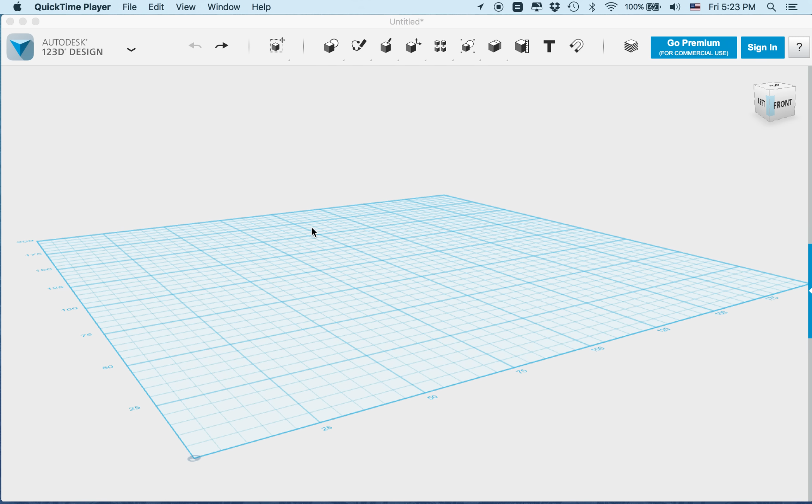Hi, in this tutorial I'll show you how to make the Williams Sonoma basket. I took the inspiration from this because I break it all the time. We keep it on the countertop and it's granite. And I couldn't help but think with my new 3D printer I'd figure out a way to simply make it. And it's got a very limited number of steps. So hopefully you'll enjoy this and just follow along.

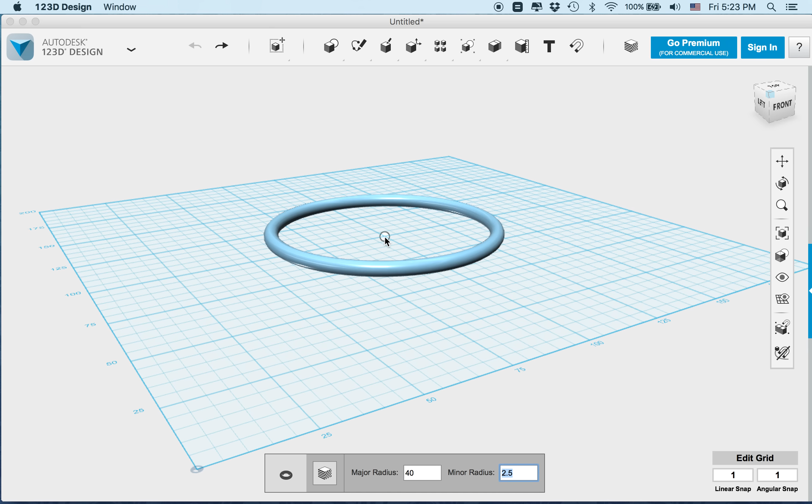So first thing I do is I looked at the base and it looks like it's a collection of toruses. So we set the major radius at 40, and the minor radius describes the distance around each of these cords, and it's 8 millimeters. So let's just set it for 8. I'm sorry, set the radius for 4, because the diameter is 8 as we measured it.

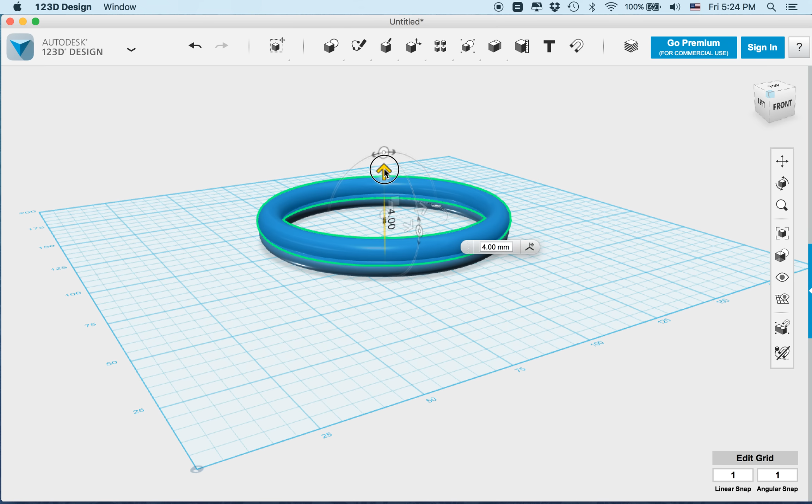And what we're going to do is take one and copy and paste it, and raise it up by just 7 millimeters, and there'll be a bit of an overlap between each of these. And then we'll do that again, cut, copy, paste, and raise that up to 15 millimeters. Okay, so now we have a nice stable base, and we're going to tilt this a little bit so we can kind of see the inside of it.

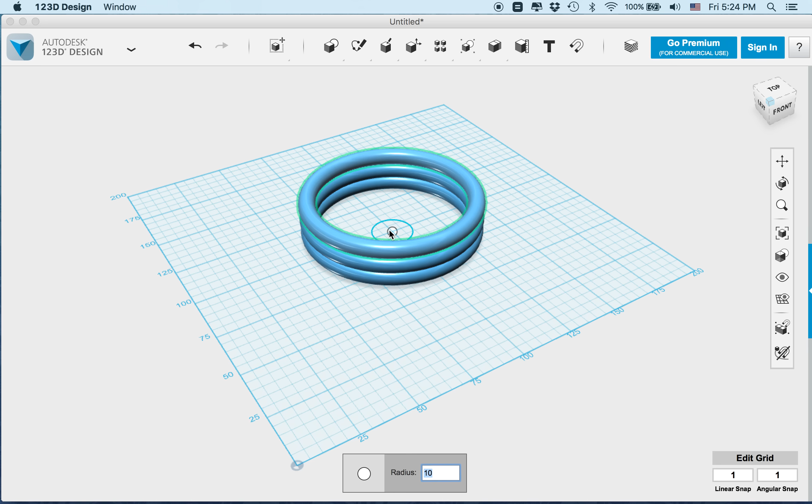I want to draw a circle in here that's also 40, and the reason will be pretty evident in just a second. So we'll draw a circle. This will allow us to do a couple of things, one of which is we'll use it to do this first extrusion. So we're going to extrude the circle out to seal up the base area, and we'll set that to 21 millimeters, and we'll go over here and merge it all.

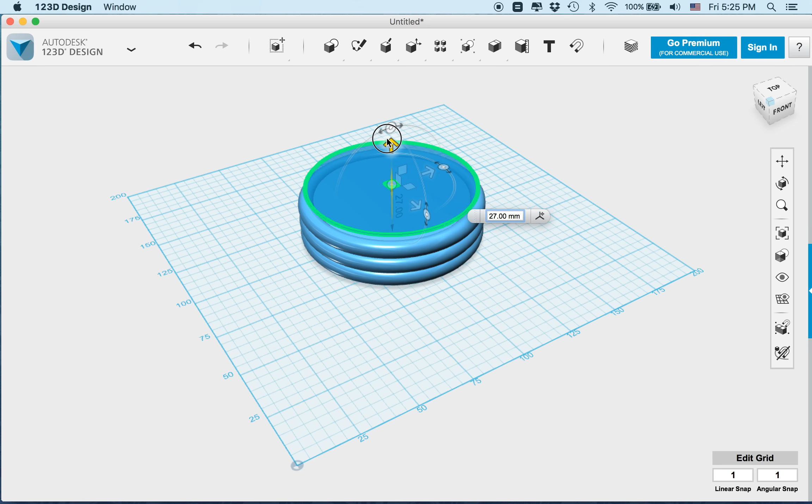So hopefully that's all merged up, and then we'll take that original circle and we're going to move it. We're going to raise it up to the top of this, don't need to raise it too far, but we're going to raise it there so that we can grab onto it and use it to draw the next portion of it. So then we're going to draw another torus, and this is where

things get interesting. So we're going to put this torus on the edge, and we're going to make it a little bit smaller. So we're going to make it not that big, about 30, to give this some diameter. Okay, and once again we're going to make the minor radius 4 to match the rest of it. So we're going to return that and put it on the edge there.

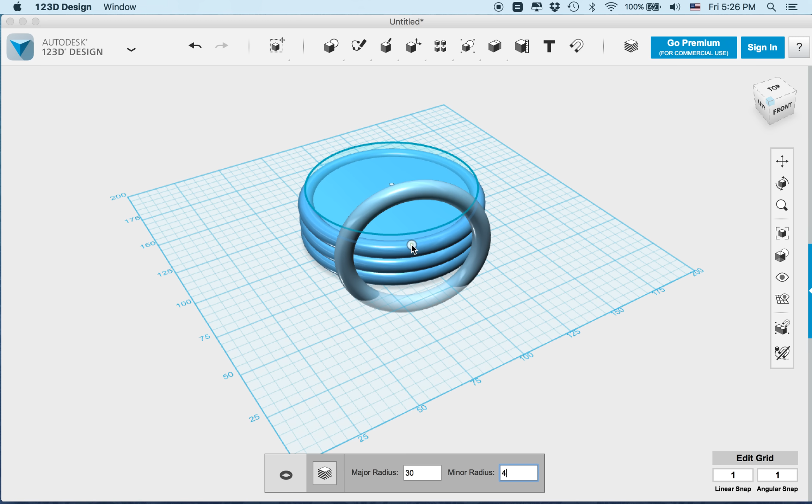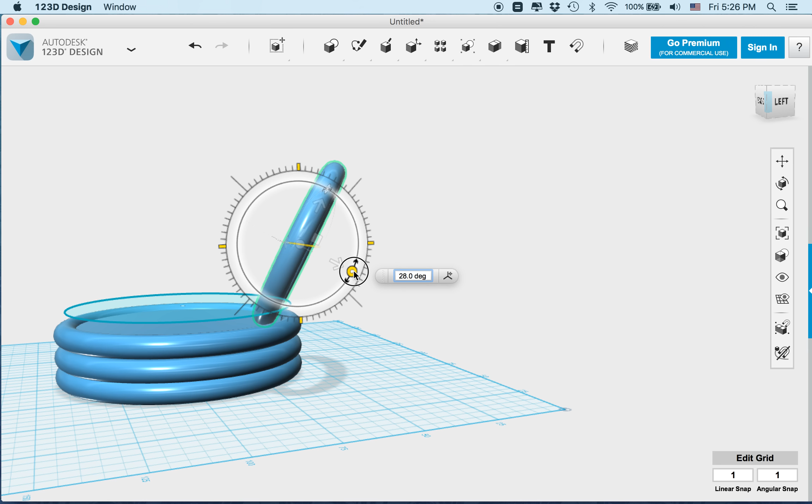And we're going to twist this around and get a good look at what that looks like. And we're going to raise it. So first we're going to move it up so that we can get it there. And then we're going to get it at a bit of an angle in this direction, because we want this fruit basket to angle out. You're kind of limited here because you don't want to go outside the limitations of your printer. So we'll set this for a nice, safe 30 degrees. Okay, so that's angle 1.

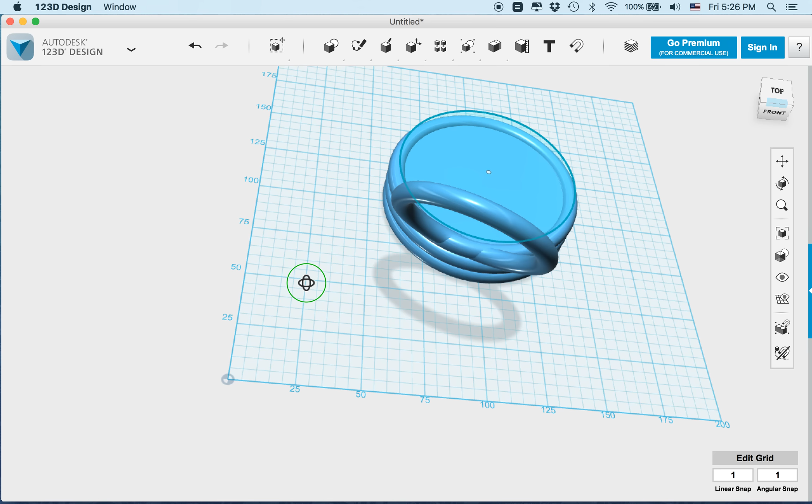So the second thing we'll do, as you'll see in just a bit, is move it out to the edge, because you want this to come in and out of this vase in a way that they overlap. And since we put it at the angle already, it's kind of got that. Okay, so we got that angled right, we got it going in and out of the vase, and now we're going to do a pattern. We're just going to sequence this one torus out a number of times using a circular pattern.

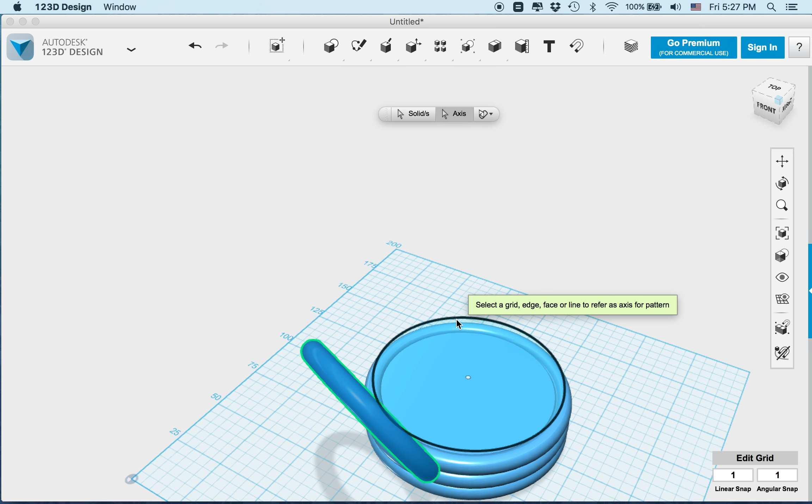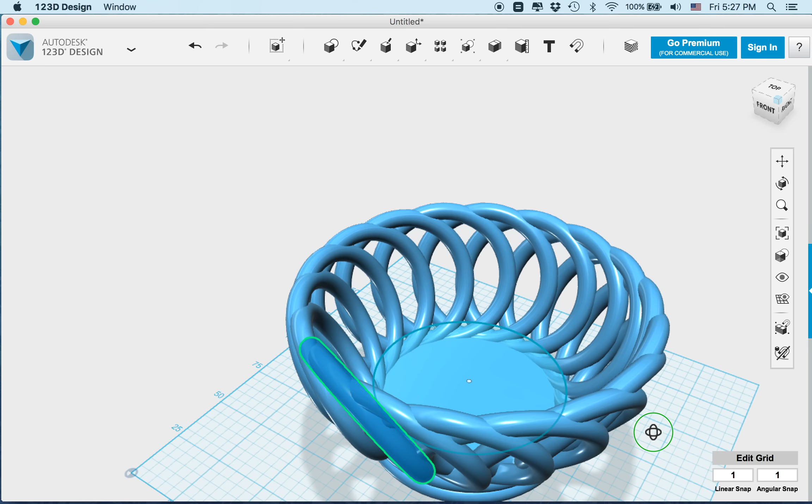So we'll select this as the solid. We're going to select the axis as that circle we brought up beforehand. It brings up 3. And to make them overlap, we're going to bring this up to a bigger number, and we'll call that bigger number 18. Click it to return. And now you've got a woven fruit basket. Delete this circle in the middle. And I'm going to combine everything, and then you're done.

So there you have it, a woven fruit basket, sort of like Williams Sonoma, and I'll include this on Thingiverse and show you how it got made.